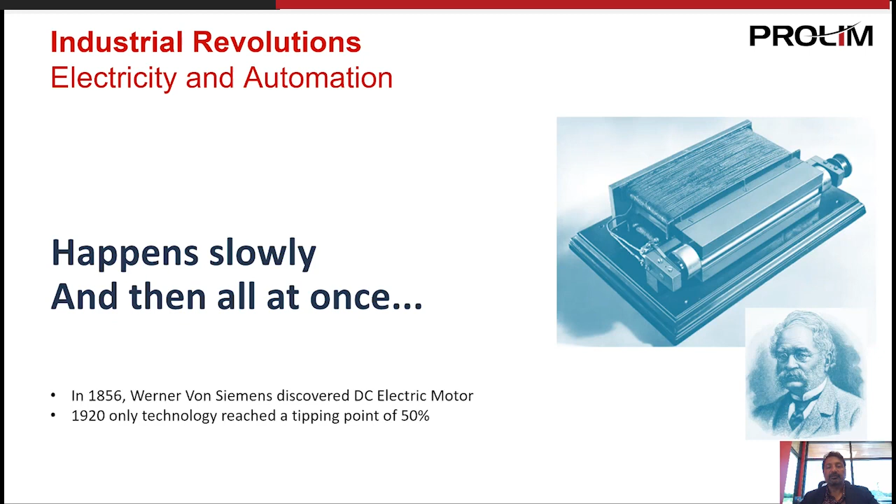The innovation really started in the third revolution, where semiconductors and electronics came into place to start building automation. In 2011, there was a lot of technology - the internet was revolutionized, but applied to general business, whereas it was not being adopted well in the manufacturing industry. The German government came up with this Industry 4.0 vision, focused on four pillars.

One, the product to be manufactured has all the data necessary for its manufacturing requirements. Two, the organization of networked manufacturing equipment. Three, flexible manufacturing based on the current situation. And four, humans remain essential as the creative planner, supervisor, and decision maker.

With that vision, as you can see, across these four industrial revolutions, industry started from the steam engine and today is at Industry 4.0, focusing on cyber physical systems, Internet of Things, and networks. The products are getting smarter and complexity is increasing. Automakers are developing advanced driver assistance systems to support demand from new consumers.

There are new forces changing manufacturing in ways we haven't seen before. One is changing the way products are realized - advanced robotics, intelligent automation, and additive manufacturing. And the way ideas come together - crowdsourcing, systems engineering, and applying analytics to improve product design and improvement. You might have heard about digital twin and digital thread.

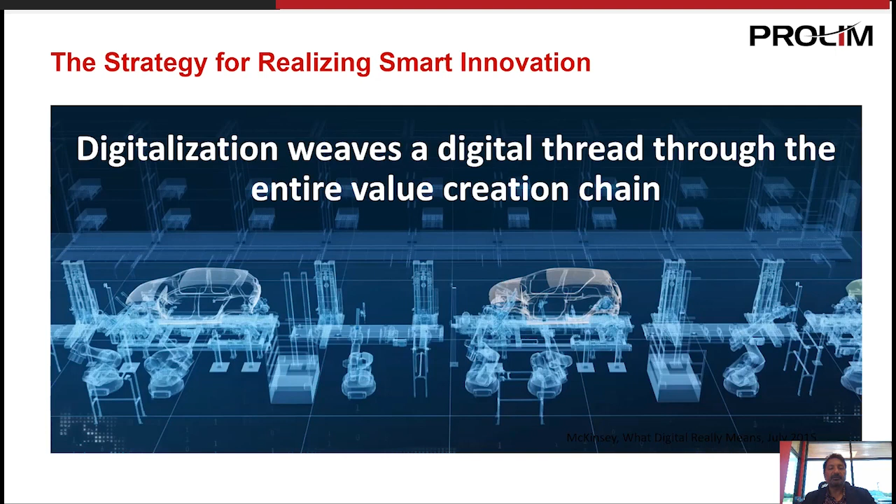Digitalization weaves a digital thread through the entire value creation chain. Without digitalization and digital transformation, it is hard to survive in this market.

Innovation has three things: one is ideation, at the other extreme is utilization, and in between is realization. Smart innovation is about bringing all three together and realizing and innovating the products.

The innovation platform has engaged users, intelligent models, realized products, and adaptive systems. PROLIM has worked hard in the last few years and built IoT solutions to enable this Industry 4.0 vision.

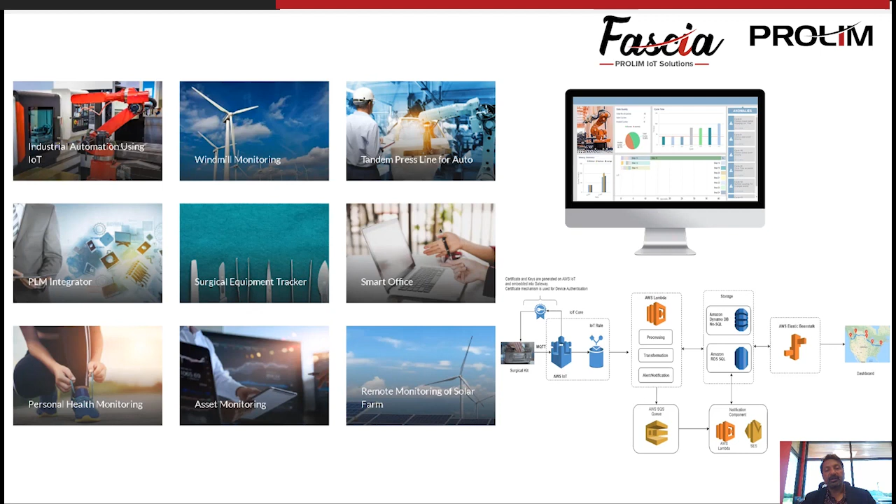We branded those products under the brand name Fascia. We have at least 6 to 8 solutions out there, from industrial robotics automation to windmill, to the tandem press line, where sheet metal enters one end of the assembly line and the doors or the hood come out the other end, and so on and so forth.

We helped our customers globally. Here is an example of our customer KSS, where we help bring innovation in their journey of active and passive safety. If you look at all the business cases, you can apply IoT solutions to reduce maintenance cost, to anticipate and reduce FDA audits if you're a med devices company, and manage the repair process, quality issues, CAPA, utilization, sustainability, and complexity.

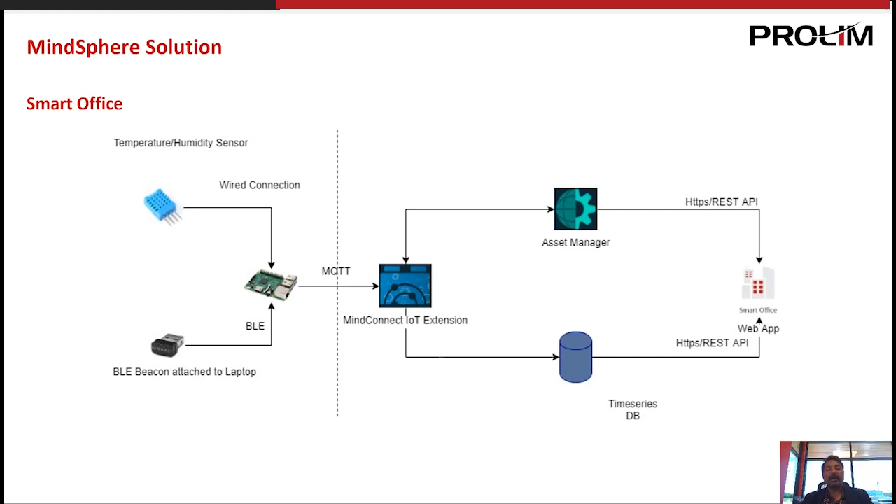Look at any piece of your organization's operations, and you can apply IoT solutions to drive value, improve efficiency, and throughput. Here is an example of a smart office where we built a very simple solution quickly within a week's timeframe, where we track all our offices globally, from India to United States, managing the humidity, the temperature, and how many laptops and equipment are inside the building versus outside the building.

Here is a simple application. Let me walk through this a little bit. When you log into our smart office, it brings up the map, and when you drill down and pick any location on our map, it shows the temperature, laptop counts, etc. If you drill down further, it shows the entire details about how many laptops or equipment are inside the office or went into the warehouse.

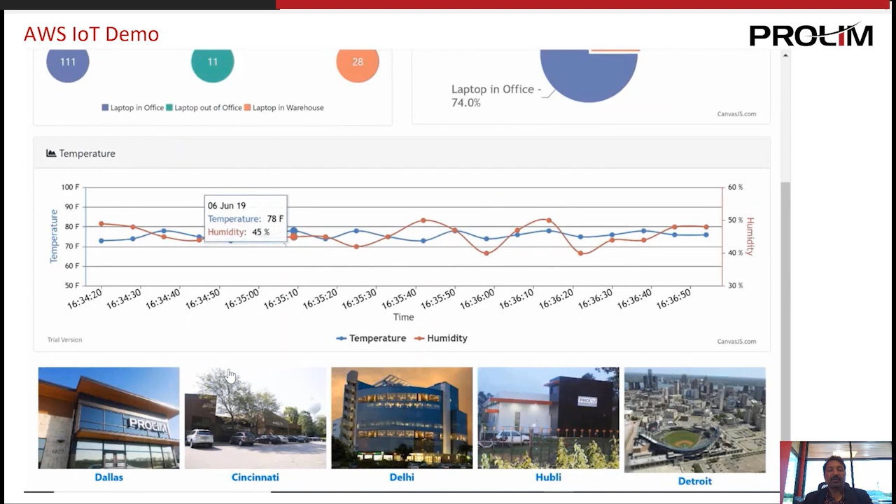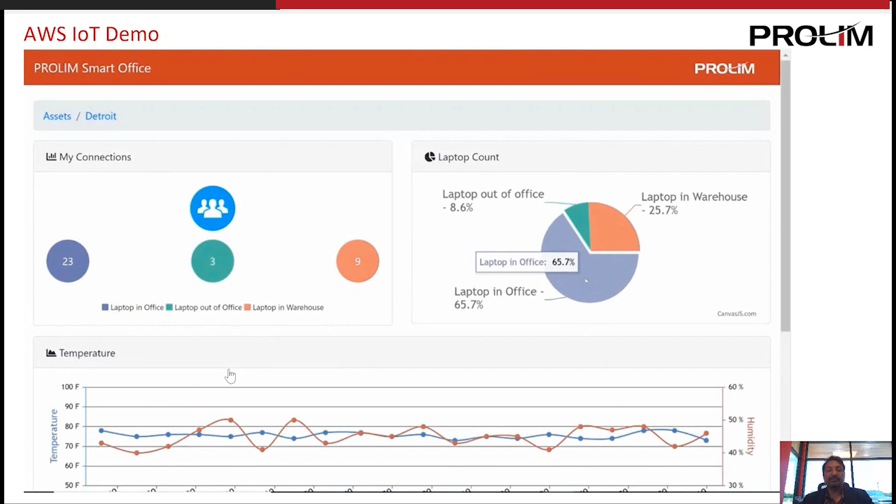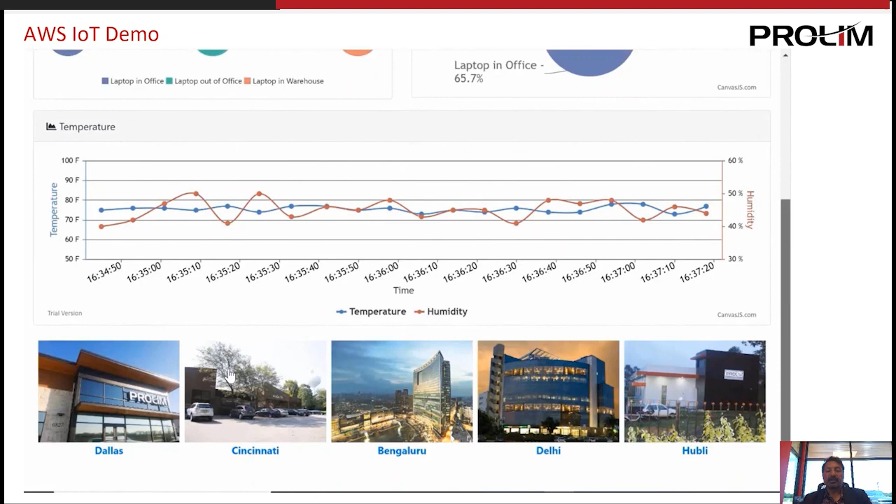At the bottom, you can see real-time temperature and humidity. If you want to pick anything on this dashboard based on our office location, it will demonstrate those three parameters. What you see is a very simple example that we built in 7 days, but it could be your automotive equipment, your windmill or wind farm, or your surgical equipment in the medical devices industry, and so forth. We can build these applications based on AWS or Siemens MindSphere in 2 to 5 weeks as a prototype.

The key part is that when designers design the excavator system, it's always designed with a high factor of safety. The key parameters, for example, are the swing of the excavator's arm, the travel speed, and the torque or swing pressure that goes into the ground. These are the key main parameters, apart from temperatures, gears, and all of those things.

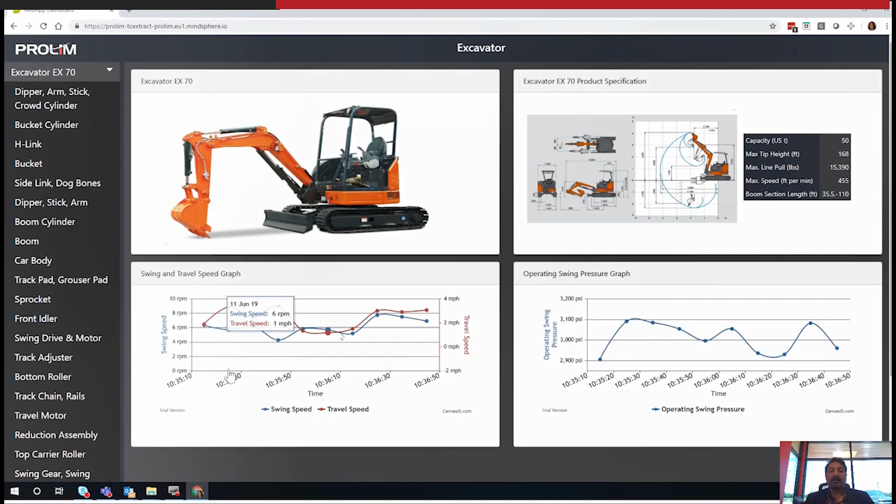So we track all these parameters based on the conditions in the field, and if there is any potential breakdown of the equipment, or if the breakdown happens, we know instantly what happened, what the parameters were at that point in time, and what the environmental conditions were. You can feed that data and information back to your R&D, to your Teamcenter and NX tools, to design and improve that particular component, system, or subsystem.

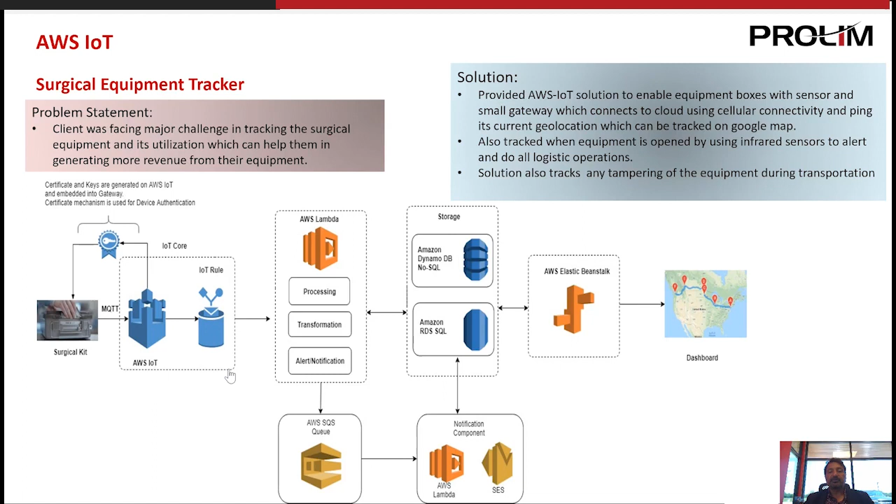Here is another example of a smart office, and another example of a surgical equipment tracker that tracks equipment as it's led from your laboratory to the hospitals, and tracks it along the way.

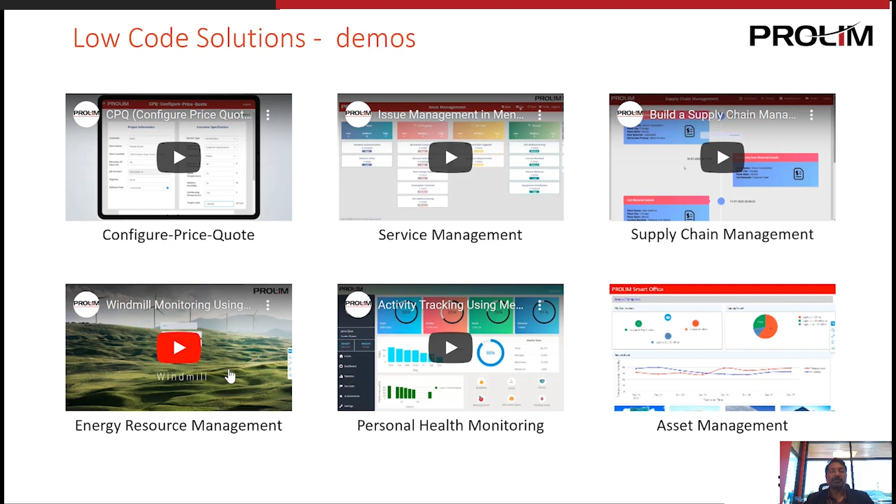Here is another patient monitoring solution, and some of the low-code solutions we've built to automate your Industry 4.0 solutions or fill gaps in your solution, from configure-price-to-quote, service management, supply chain management, and so on. We put this entire concept into our digital transformation platform built on the Mendix platform, from concept to configuration, across different rule streams, CPQ, NPI, bringing the CAD BOM, engineering BOM, PLM, ERP, and program management and quality systems all together to define a digital thread and help you with digital transformation.